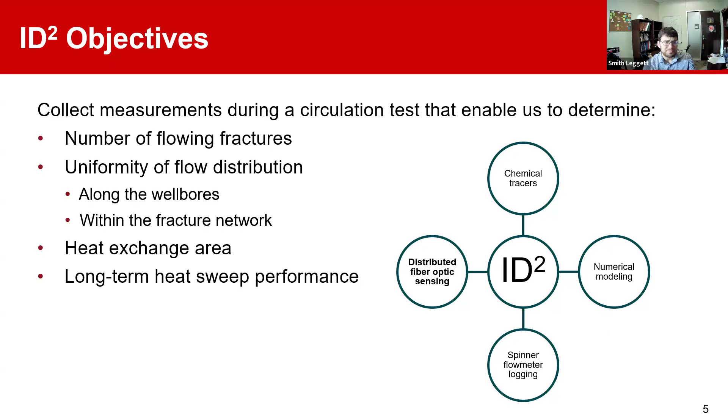Fiber optic measurements at Forge have been really vital. They've given us great measurements: cement monitoring and characterizing how the cementing of the 16B well was done, measurements of the geothermal gradient, and they're used to see frac stage zonal isolation and crosswell frac hit identification.

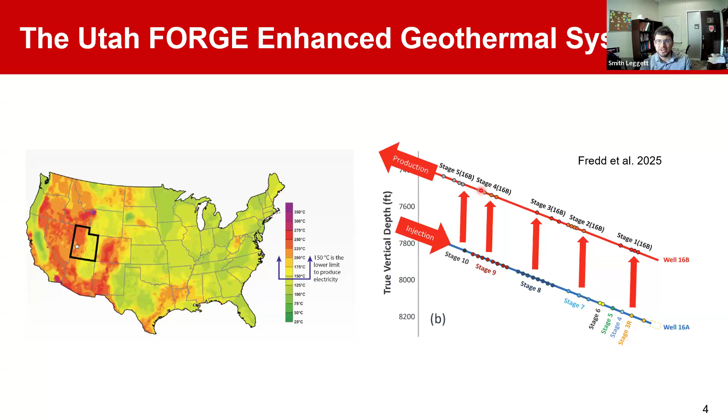The perforation intervals on the 16B well were actually chosen this way: the 16A was stimulated first, and where fiber optic distributed strain sensing indicated a fracture had intersected the well, that's how these perforation locations were chosen. Fiber has also been used for microseismic monitoring, and more.

So we'd really like to have fiber optic cables in this system to help us diagnose what's going on downhole. But one of the problems is there's been a history of fiber failures, not only at Utah Forge but in general in enhanced geothermal systems at these high temperatures. Rice and Silixa had a team that deployed fibers clamped to the outside of the casing, and UT and Shell had fibers deployed that way as well. Some of those fibers lasted longer than others.

Some of them made it, able to sense during the stimulation of the wells. But by the time we were about 10 days into the circulation test in August 2024, all the fibers had failed down along the completed interval of the 16B wellbore. That was a shame for multiple reasons, one being our project, starting in 2025, depended on having those measurements.

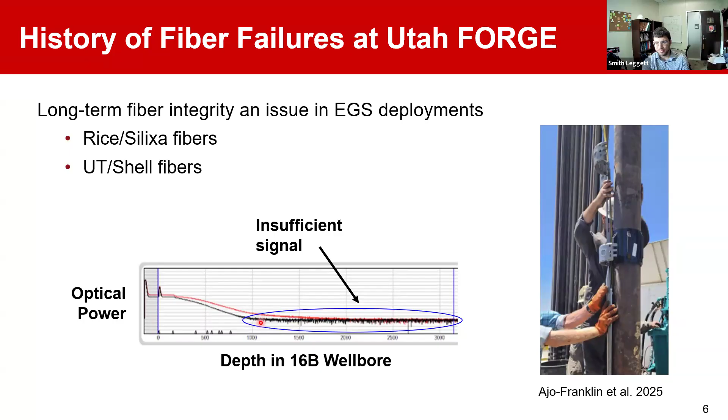We talked with Precise Downhole Solutions, folks who do coiled tubing deployed fibers in SAGD, steam assisted gravity drainage applications in Canada. They're used to deploying fibers and have high survivability in temperatures not too far off from what we're encountering in geothermal systems. Our main thesis was, after these fibers failed, maybe we can borrow some technology from Canada, where they've figured out how to do these hot fiber optic deployments, and then apply this to a geothermal system.

Here's a cross section of a 1.75 coiled tubing string, and you can see some quarter-inch capillary tubes inside of there. Inside each of these capillary tubes is a fiber optic cable with a coating. It's got an outside diameter of a few hundred microns, so just barely thicker than a few strands of hair.

Another neat technology that Precise has, and that they've shown in Canada, is this turnaround sub. Two of these capillary tubings are connected at the bottom with this turnaround sub. So in case one of these fibers fails, you can inject liquid at high velocity down one of these capillary tubes, and then blow out or produce the fiber, and redeploy a new fiber. You can inject in a new fiber. So you have zero intervention fiber replacement options, and this coiled tubing string can be run and deployed as needed.

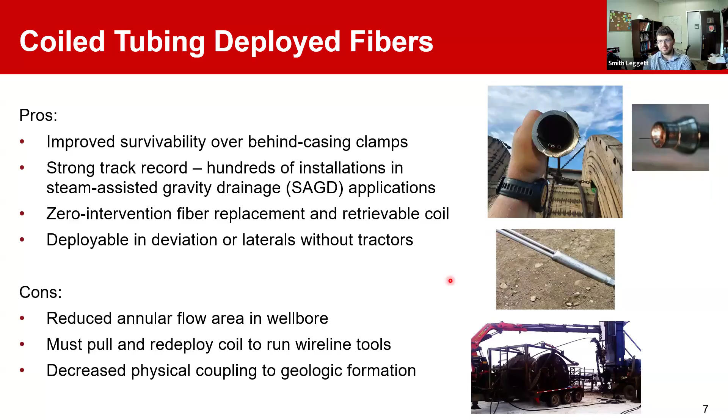Our objectives were to design and deploy an instrumented coiled tubing string in the 16B well. Basically, get fiber optic sensing back at Forge, and then obtain measurements from this coiled tubing and other diagnostics during a one week circulation test, so that we can characterize the fracture flowing pathways for long-term heat sweep efficiency simulations. I'll present today on the design and deployment of this coiled tubing string, and also the preliminary results that we're seeing from this one week circulation test we did in August of 2025.

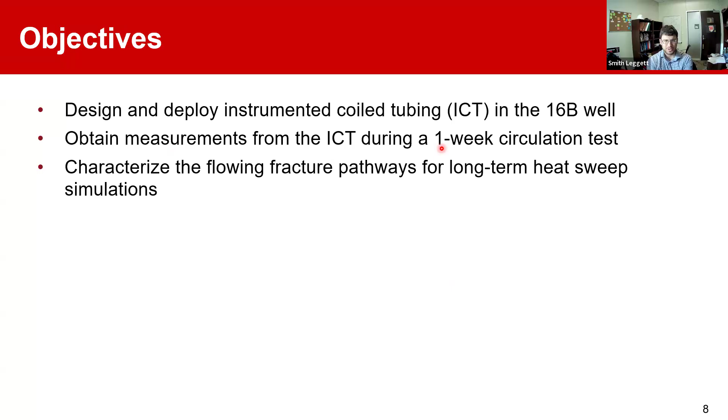Starting off with the design of this instrumented coiled tubing string. At a high level, we knew we wanted to do distributed acoustic, temperature, and strain sensing. With distributed acoustic sensing, the fiber acts like you have a microphone every meter along the whole wellbore, and we can pick up microseismic activity and flow noise. It's also sensitive to temperature changes. We wanted distributed temperature sensing, which is very useful for long-term monitoring of thermal breakthrough between the wells and geothermal gradient sensing, understanding what's going on with the flow, and then distributed strain sensing.

I've acknowledged that we have decreased physical coupling between the fiber and the formation, but what we really hoped to see is when we injected into this fracture system and the fracture started dilating, we hoped to be able to detect where that was occurring. So we wanted to try an experimental strain sensitive fiber that's completed a little differently than what's normally done in SAGD. We also wanted to have a bottom hole pressure and temperature gauge.

So we have a total of four quarter-inch capillary tubes in our coiled tubing string. Three of them are for fiber. One has a multi-mode fiber used for distributed temperature sensing, and another has a single mode fiber used for distributed acoustic sensing. These are connected with a turnaround sub, so they can be retrieved if they fail and then redeployed.

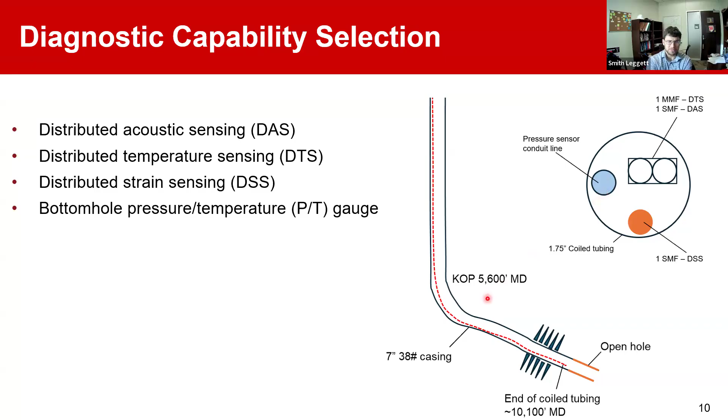So this is just another schematic showing that. So the design of the coiled tubing, we went with a 1 3/4 inch outside diameter coil, and that was based on a few things. One was the number of capillary tubes we had to fit inside of here. And then there were also mechanical deployment considerations.

They worked with a coiled tubing company to model the Utah Forge well trajectory, to check if this coiled tubing could actually be deployed to depth with the friction modeled. And then also wall thickness, depending on the pressure rating we expected to see, and fluid exposures. One thing to note is that

the inside of the coil is not connected, is not exposed to the wellbore fluids. So there's just air inside this coiled tubing string. And there's a ported bull nose—we'll see a picture of it later—but that allows a connection to the bottom hole pressure sensor. Aside from that, there's no connection between the inside of the coil and the external environment, so we've got a lot of strong protection for our fibers.

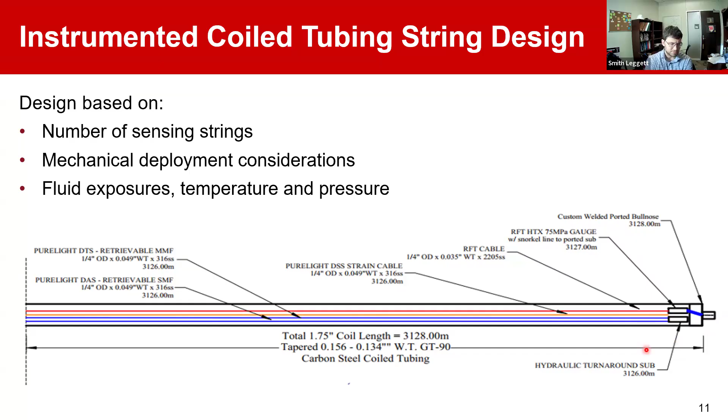For the strain sensitive fiber, Precise conducted laboratory testing of different silicone gels. The goal we were trying to achieve was: if we have fractures dilating that cause a bit of stretch on the casing, we hope that frictional coupling with the coiled tubing and the capillary tubes might allow the fiber to pick up some strain through that.

So we wanted a silicone gel to couple the fiber to the capillary tube, but we didn't want too strong of a coupling so that it wouldn't fail. So they did experiments at various temperatures with different gels to try to find the sweet spot between allowing some slip, but also good strain transfer.

And so then we went and manufactured this coiled tubing string. This is a picture of a cutaway of it. You can see three of the capillary tubes inside of there. And this is a reel of about 10,500 feet of this 1 3/4 inch coiled tubing string.

And at the end you see this ported bull nose—that's where hydraulic pressure can come in for the pressure sensor to be able to sense that. Now, this was on the longer side of a deployment, especially relative to SAGD wells, which are typically much shallower and often shorter. So when we went to pump the silicone gel, it was highly viscous, and we reached the maximum pressure of our pumps pumping the silicone gel into the strain sensitive fiber.

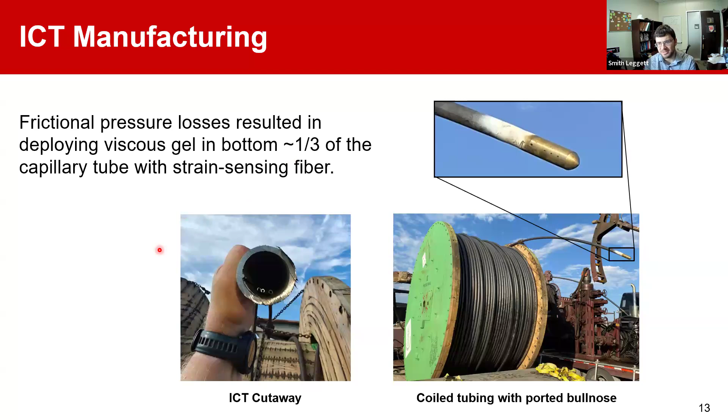We did have to modify the 16B wellhead to install this coiled tubing. So we added wing valves and a coiled tubing hanger, so we don't have to have a coiled tubing unit out on location for the duration of the circulation test. You hang the coiled tubing in the wellhead, and it can be used for long-term monitoring.

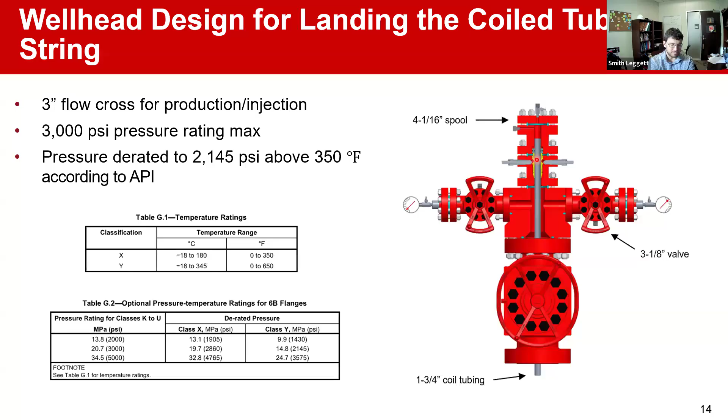So that was the design, and now here's the deployment, a picture of the installation. We wanted to land the end of the coiled tubing past the final perforation, but for risk reduction, to stay out of the open hole section of the 16B. So we landed the end of the coil right at 10,100 feet measured depth.

And this is what the 16B well looks like now with the coiled tubing string, with the capillary tubings containing the fibers, and the tec line protruding from that.

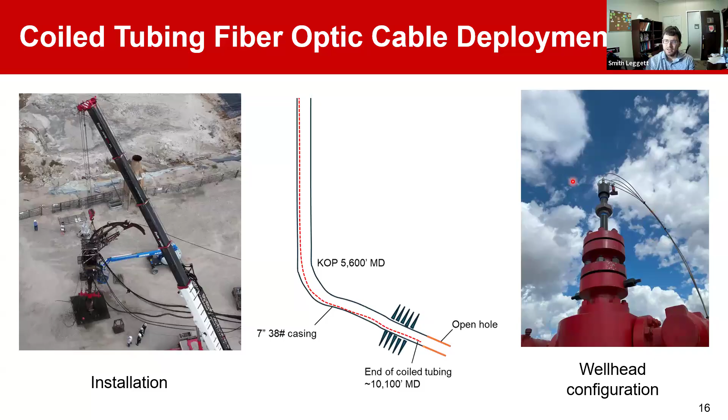So, some operational lessons learned. The 16B had pressure on it, and we didn't want to kill the well, so we had to do a stripping operation.

I'm not going to go into too much detail on this, but you require a special piece of equipment called a work window that allows you to run the coil, and then when you're ready to land it, you close the BOPs, open and bleed off the pressure up here, insert the slips into this work window, close the work window, reopen the BOP, and then land the coiled tubing in the wellhead.

In our paper presented at Stanford on this, we detail some of these operational notes, if you're ever trying to do this on your own well in an enhanced geothermal system. One of the lessons we learned is that the coiled tubing company that deployed the coiled tubing measured the weight versus time, but not depth.

They did not digitally log the weight—they had a manual process. When I found that out, I started sitting in the van and would have them call out the depth we were at for various loads.

Without dwelling on this too long, when we were running in we encountered high friction in the deviated parts of the well. In fact, we completely stacked out the string in the perforated interval between 9,580 and 10,000 feet. That could have been due to deviation, or it's possible we had sand accumulated in that portion of the wellbore holding us up. We're currently working with a coiled tubing company to model this and see if we were encountering sand or if that was just our expected frictional profile.

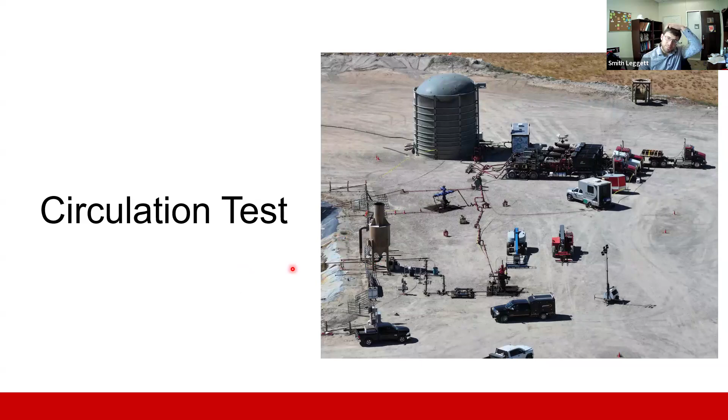This work presents the August 2025 circulation test, not to be confused with the August 2024 circulation test. Our circulation test was 7 days, whereas the year prior Forge did a 30-day test. Our test was shorter, so we may be seeing more transient effects, but it's neat to do a kind of one-year-later time lapse. We really designed our 2025 experiment to mimic the 2024 experiment as much as possible to facilitate a comparison of how, if at all, the enhanced geothermal system has changed a year later.

Our fiber optic system maintained its integrity throughout the duration of the circulation test. We did tracer tests both times—we added reversible adsorption tracer tests to try to estimate the heat exchange area. I'm not going to talk too much about that part because we're still getting results from it.

In this case, both times we had surface measurements, but this was the first time we had downhole pressure and temperature measurement during the circulation test in the 16B. So, very similar tests.

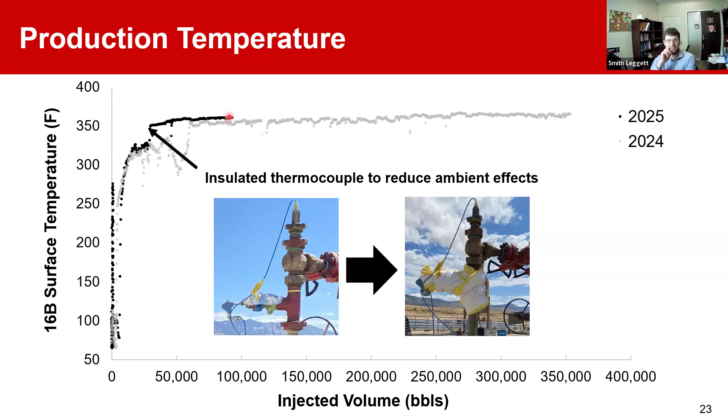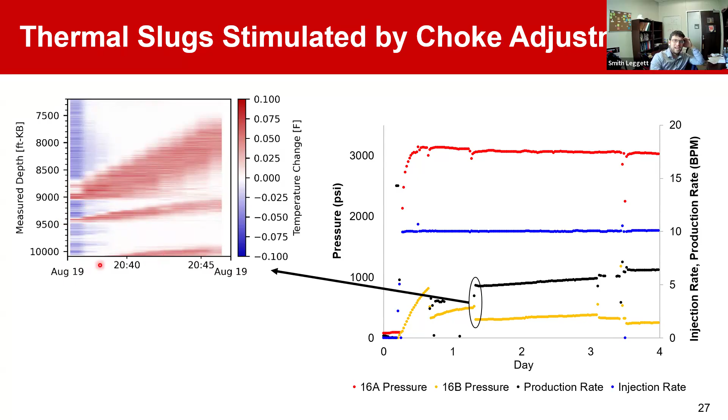You can see little slugs of hot fluid entering the well and then traveling up the well. We can see inflow at stages 5, 4, 2, and then from below our perforations in the open hole section. I have a student who has done numerical modeling, and also come up with a pretty simple analytical solution to take the slope of these thermal slugs and infer a production log from them.

So we just presented the injection log on the 16A. Now we're using our fiber optic measurements to interpret a production log on the 16B, and we're comparing our thermal slug-based production log to the spinner production log that was run in 2024. In 2024, they could not run the tool below stage 3, so they had to lump the open hole, stage 1, 2, and 3 all together.

If you look at this in the lumped terms, the results are really similar. 70% of the flow we indicated was coming in through stage 4 and 5, and that agrees pretty well with about the 2/3 estimated in 2024. We're estimating a total of 30% of production coming in from the open hole, and then stage 2. We did not see those thermal slug signals at stage 1 and 3. It's possible we were getting inflow in stages 1 and 3, but there was just no thermal slug signal initiated. Our current preliminary interpretation is that this is the flow distribution.

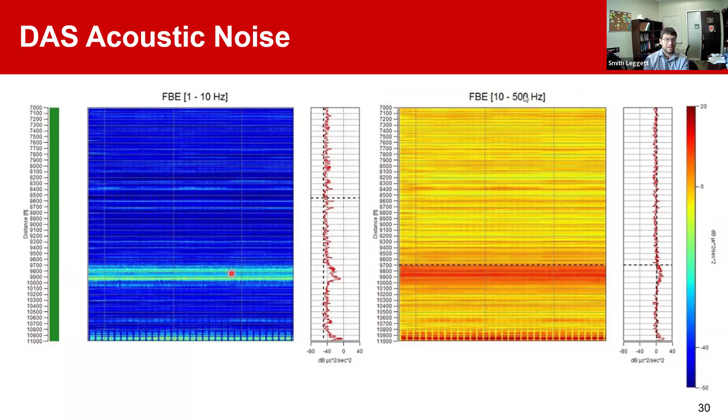This is a plot of the DAS acoustic noise. These depths are not zeroed to surface yet, but you can see these bands which, when you shift them, correspond to stage 4 and 5. We think we're hearing noise associated with inflow from perforations in stages 4 and 5, and those were pretty constant sound bands throughout the duration of the test.

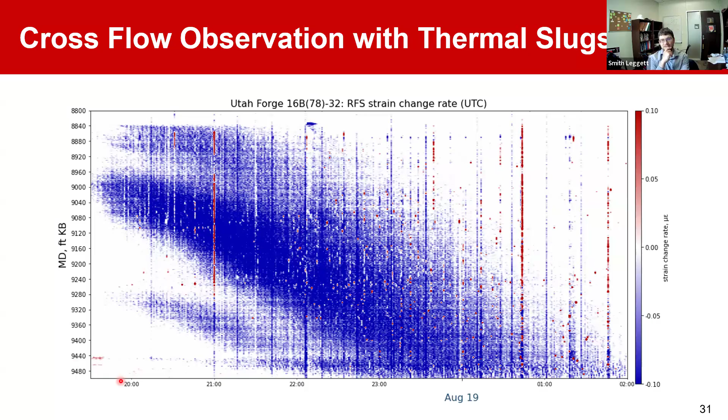Our interpretation is that when we're injecting into the 16A, there are highly conductive flow pathways to stages 4 and 5, and that it is recharging the reservoir—fluid comes in quite easily to those stages 4 and 5, and then it's recharging through the 16B toward the toe of the well. So we would generally observe that the heel of the 16B is much more well connected to the 16A than the toe, and we want to come up with more quantified interpretations of this in the future.

We also injected some tracers during these tests, similarly, and that analysis is still forthcoming. But we did see similar responses where the tracer response could be modeled as two dominant flow pathways in the system—one with a fairly shorter residence time and the other with a longer, more diffuse residence time.

If we go to the average residence in barrels, we see one component has an average residence of about 6,000 barrels, where the other one has a higher.

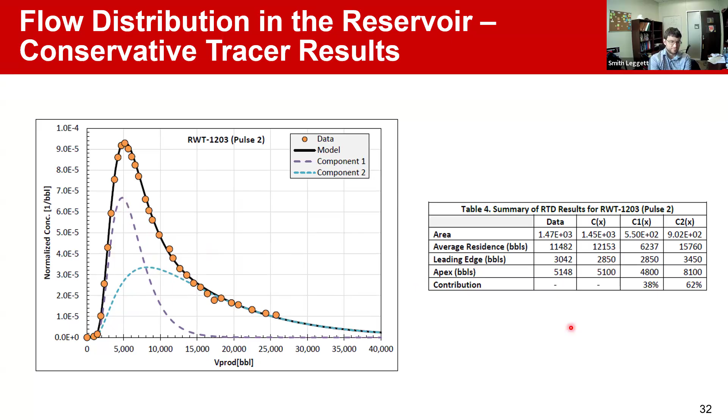That's kind of the end of what I have on the circulation test, but one final note is that DAS was recorded during stimulations conducted by an offset operator, and the fiber optic cable was actually able to pick up microseismic events through the coiled tubing during this offset stimulation. I show that to help wrap up our conclusions here, that this instrumented coiled tubing was able to provide valuable temperature, strain, acoustic, and bottom hole pressure measurements. We were able to detect thermal slugs to use for production logging, and we were able to see microseismic events through multiple layers of a wellbore completion.

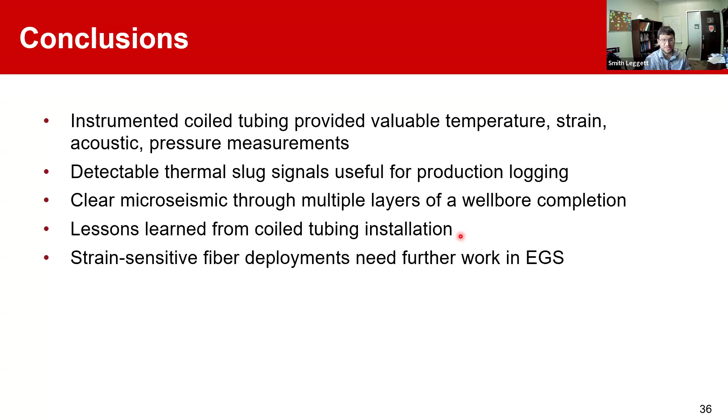We have some lessons learned from the coiled tubing installation, such as make sure that the coiled tubing company has a depth counter on their string, and you can read more about that in our paper, but our strain sensitive fiber failure shows that these continue to need future work.

Regarding the circulation test observations, there are both similarities and differences in the results. The injection profiles are somewhat similar, yet with stage 10 taking more and more over time, and the open hole in stage 3 taking less and less over time, while the production profiles seem quite similar.

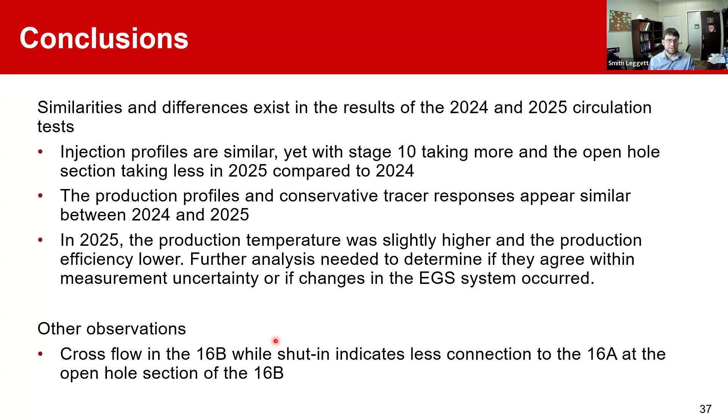Our crossflow indication just shows that the heel of the 16B is much better connected to the 16A than the toe. With that, I'll stop talking, and thank you very much for the opportunity to speak with you.

Thank you, Smith. That's a fantastic presentation.

You do have several questions in the chat, and if you can't see them, I can read them. The first one is from William Harbert, and William is interested on slide 18: what does the negative weight mean, and what are its implications?

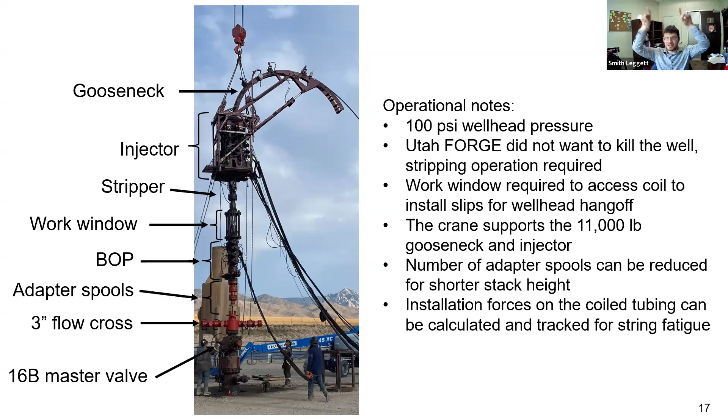Yeah, so slide 18, the negative weight. Let me go to a picture of this. The coiled tubing unit has something called an injector, and this has some grips on it that is actually able to push the coiled tubing in. It kind of looks like tracks on a track hoe that go around and grip that coiled tubing and push it in. So when the weight goes negative, that means the coiled tubing is not falling into the well under its own weight. We're having to actually push it in, which means we think this could be an indication of sand that's accumulated in the well, a high friction interval that we're having to push this coiled tubing through.

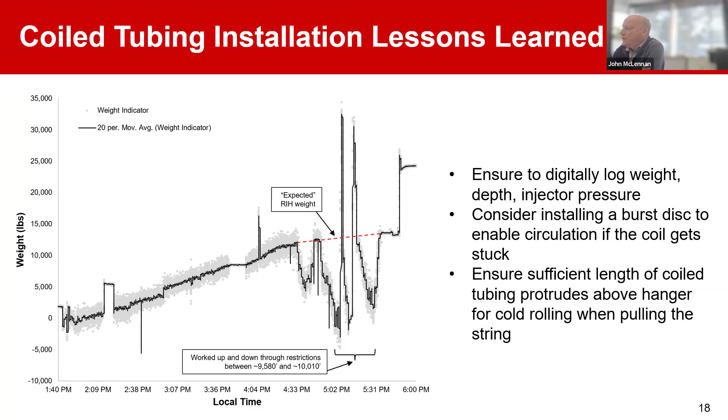The second question is from PF Rue, who is interested in why the attenuation profile seems to change over depth on the OTDR plot that you showed. How do you explain those losses, the huge loss close to the surface and the other smaller loss events deeper midway?

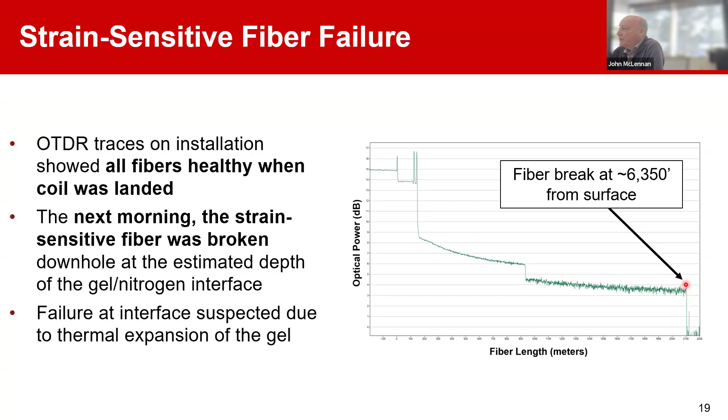Okay, great. The next question is from Leopoldo: can you comment on why the pressure fall off in 16A is so slow when pumping is stopped? If both wells are connected with fractures, I was expecting this fall off could be faster.

Okay, so I think the question is related to the pressure response when we shut in at the end of the circulation test.

Maybe one way to think about this is when you're injecting into the 16A, you have a higher pressure region around the 16A, and you have pressure losses as it flows to the 16B. When you shut both wells in and stop flowing, that pressure is going to try to equilibrate.

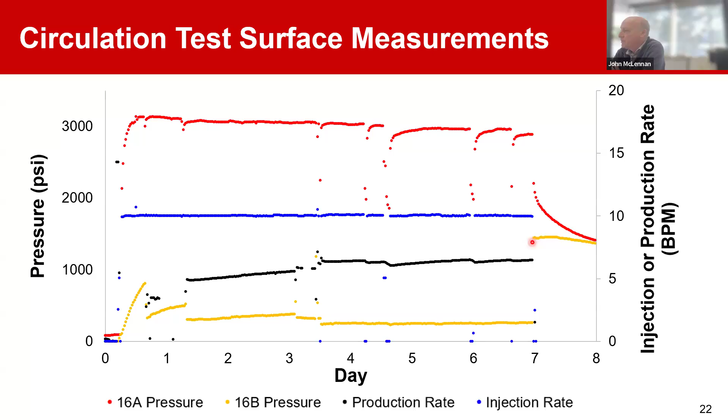The next question is from Con Wu, asking based on the thermal slug response in 16B, what is the production distribution among stages 8, 9, and 10? How does the thermal slug behave over these stages?

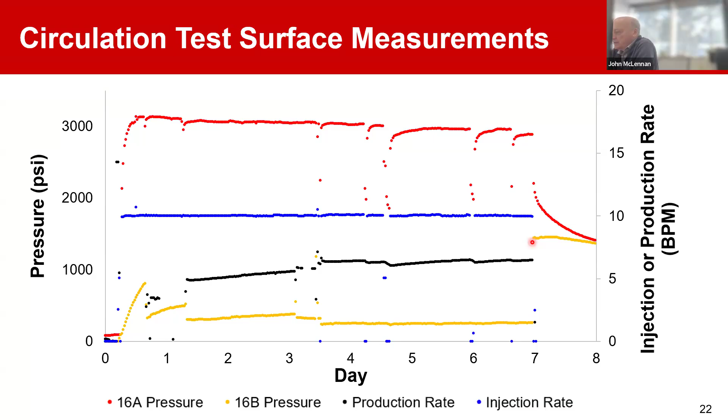Hi, Dr. Wu. To clarify, the fiber optic cable is in the 16B wellbore, and there we have an open hole section in stages 1 through 5. So we're measuring thermal slugs in the 16B.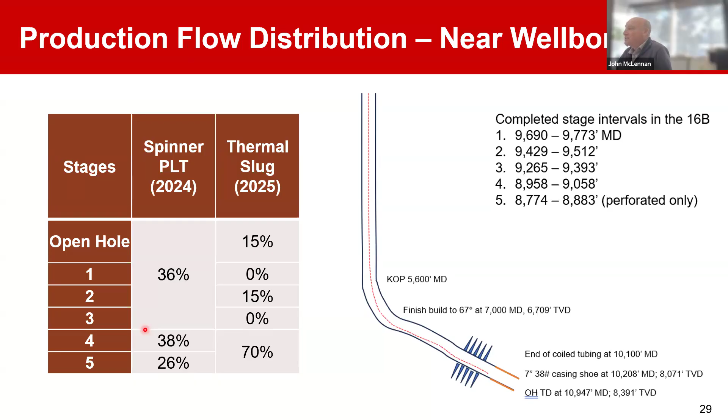Okay, and Jonathan Aho Franklin has a technical question: what IU was the microseismic gathered from?

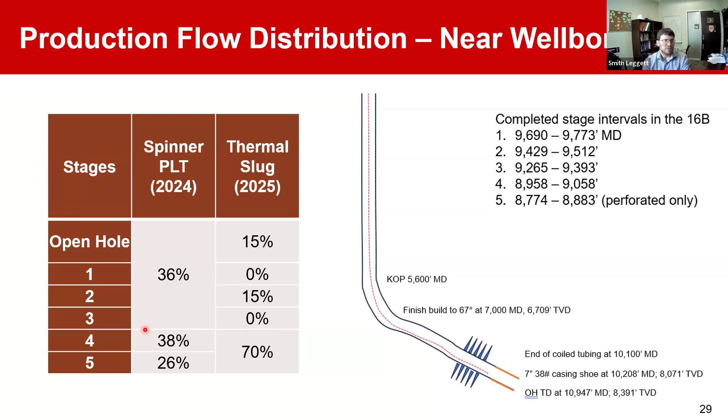Yeah, that was Nubrex's DAS unit. I forget their name for it, but actually I think this microseismic event came from the offset operator who had hooked up their box. So you probably know better than me on that.

That might be an IDAS V2. The offset operator was recording during the offset stimulations, and as I understand it, that data will eventually be made publicly available. We also did record DAS during our circulation test with Nubrex's unit.

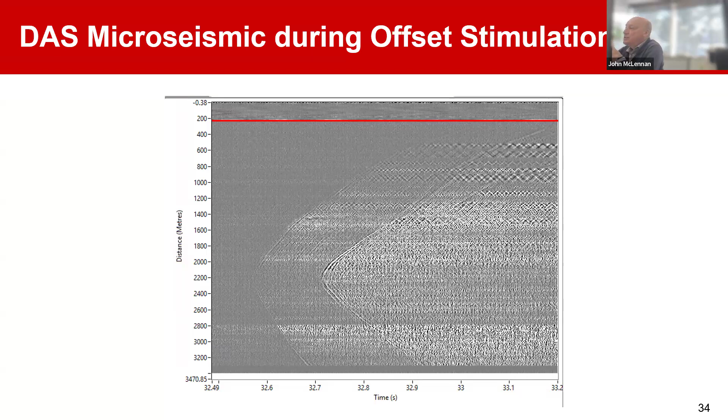And the final question, or final for now, Jean Alcouri wants to know: on slide 24, the 0.6 production efficiency seems fairly low. Any idea where the fluid is going?

Maybe, yeah, we'll start with that. He's got two more questions.

Okay, yeah. So I think what's encouraging is that the trend is still upward and almost linearly upward with this stored volume versus production efficiency. I think the trend from 2024 would show that continues out to more and more stored volume in the reservoir.

So how I interpret this plot is we are still reaching a steady state in our flow paths in our enhanced geothermal system. We haven't reached steady state yet.

Jean's second question was, did you see any pressure measurement indication of recharging at nearby wells? That's a good question. John, do you know - actually, yeah, yeah.

After stage 8 of the stimulation of the injection well, there was a pressure signature at an offset well known as 5832, and there is some communication between the 16A injector well, the production well, and this offset well.

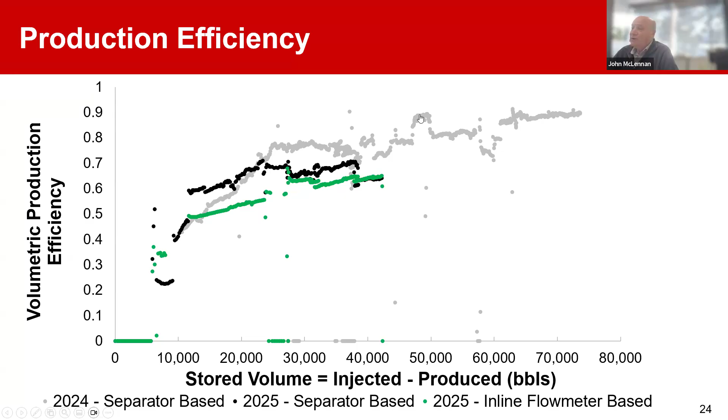A really forward-looking technological development. I think congratulations to you and your team.